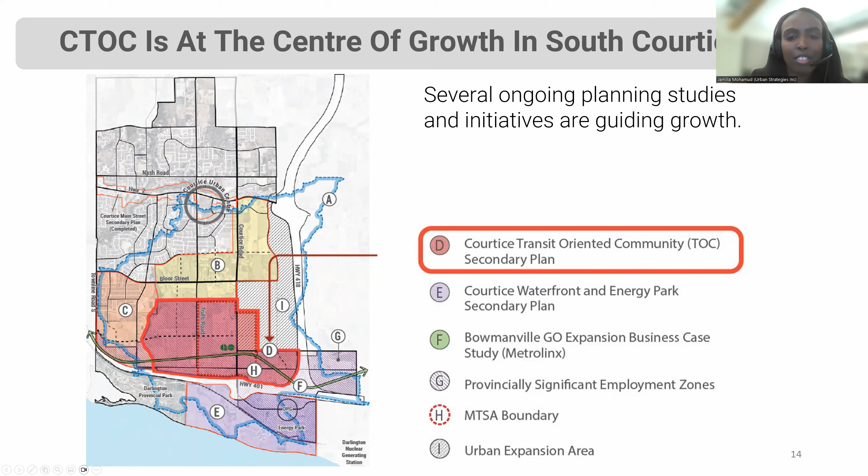Metrolinx is advancing plans for a GO train expansion, and they're continuing to refine design for a recommended option. The proposed new route will strengthen GO services dramatically within the community by providing two-way, all-day service and integral connections to the existing Durham Region Transit bus network.

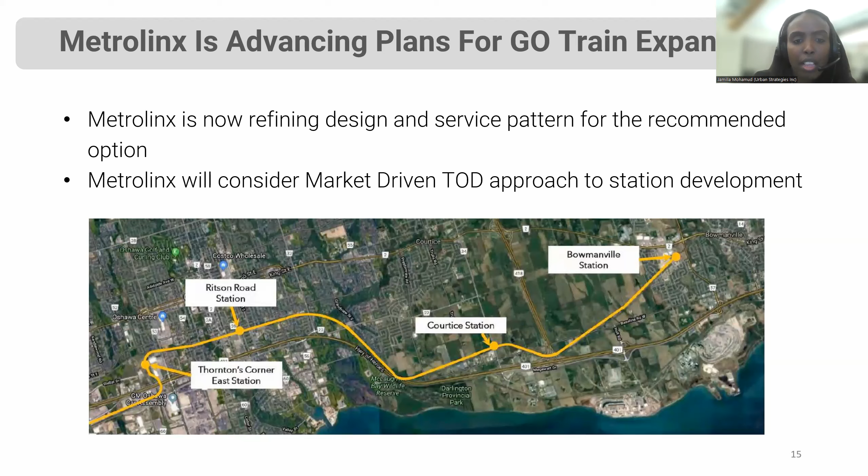Provincial policies have emphasized the significance of transit-oriented development, as highlighted in the provincial policy statement. Some policies speak to accommodating a significant supply and range of housing options through transit-oriented development, TOD, helping prioritize intensification in proximity to transit corridors and stations, as well as improving the mix of employment and housing to shorten commutes and decrease congestion.

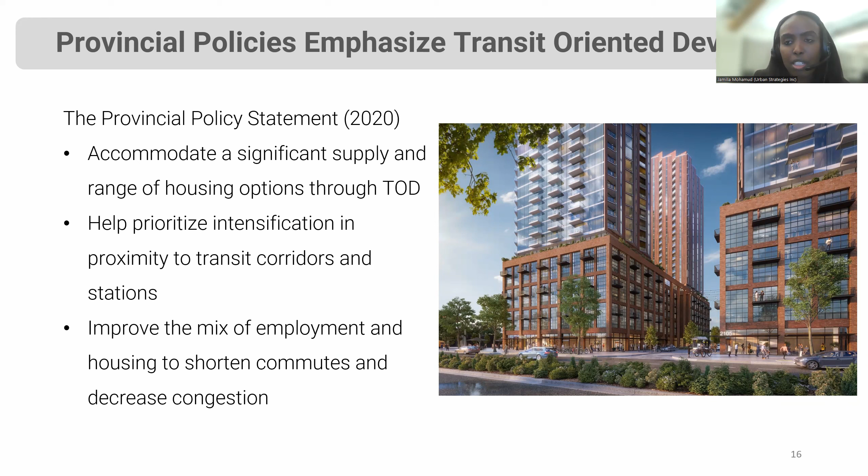The growth plan also speaks to the significance of major transit station areas, or MTSAs, as areas to focus mixed use and higher density growth. These policies address the lands within 500 to 800 meters of higher order transit stations, such as the GO station. They also focus on transit supportive densities and a diverse mix of uses. They set minimum density targets, and the Courtice MTSA will be planned to achieve a target of 150 people and jobs per hectare.

Development in the MTSA should also be planned to have a range of housing options, and the Planning Act provides municipalities with tools to require a defined amount of affordable housing within new developments through tools such as inclusionary zoning.

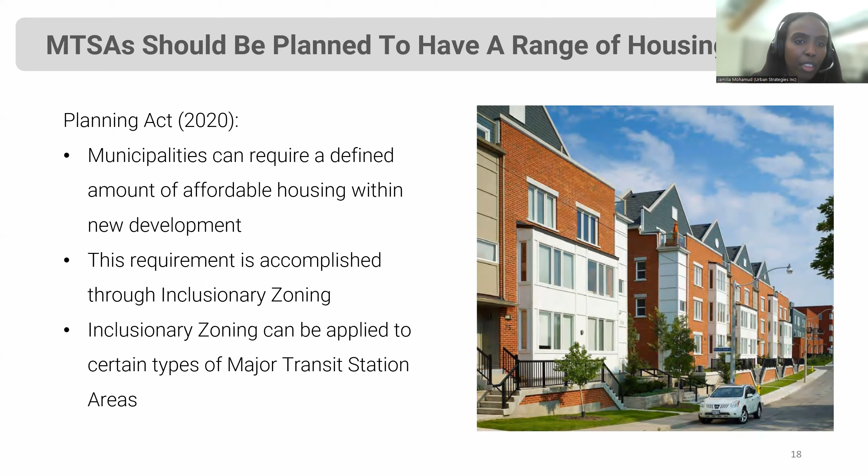Through the conversations that we've had with the public, stakeholders, and landowners, we've been able to integrate that into a set of planning policies. These 15 guiding principles were developed for the CTOC area to guide planning and provide a foundation for the secondary plan. The principles were informed by the study team's analysis of opportunities, review of best practices in transit-oriented community design, and consultations. In addition to guiding the development of land use options, the principles provide a basis for the criteria used to evaluate the 3 land use options we've already spoken about. The guiding principles are grouped under key themes: the environment, places for living and work, moving around, the public realm, and fiscal sustainability.

So I'll pass it to Tim, who will speak to you more about how we've integrated the feedback into the draft preferred land use plan, road network, and policy directions.

Great, thanks Jamila. Good evening, everyone. Before I jump into the draft preferred land use plan, I just want to spend a few slides providing a little bit more background. Hopefully from Jamila's part of the presentation you get a sense of a lot of the background work that has been done and what's gotten us to this point.

More specifically, what's led us to the preferred land use plan is the exploration of some land use options that began almost 2 years ago. We have been at this study for quite some time, as some of you are well aware. Coming out of our first phase of work, we identified what you're seeing here on the screen, a very high level framework for defining land use districts and generally exploring land use options.

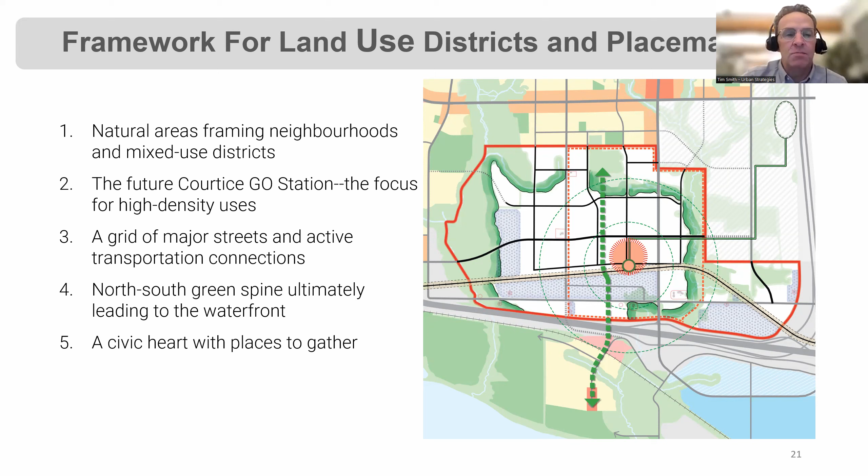Moving on, Jamila, next slide.

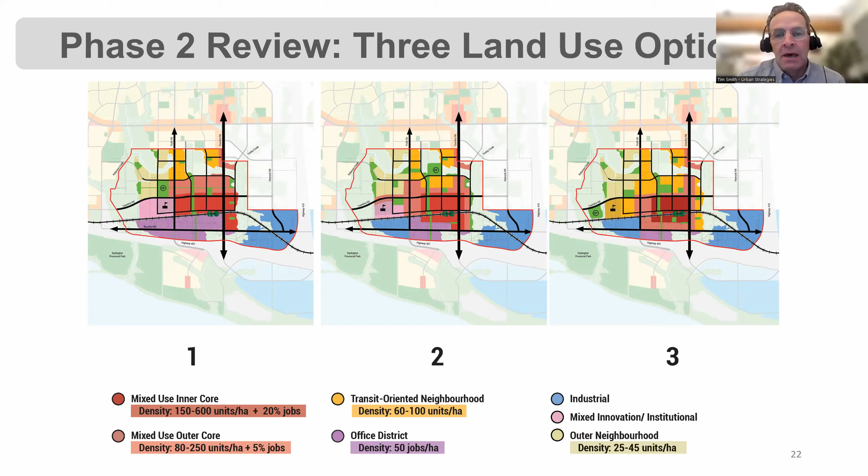So I won't spend a lot of time walking through the land use options, but just to give you a sense of the work that was done, we created three options that looked at the land use districts you see at the bottom here: a mixed use inner core, mixed use outer core, transit oriented neighborhood, an office district, as well as industrial areas and a couple of other areas, including an outer neighborhood focused west of Trulls Road. You see different approaches to distributing those land uses, as well as different approaches to locating future major parks. As you can see, they're all based on the same road network.

Next slide, sorry, Jamila.

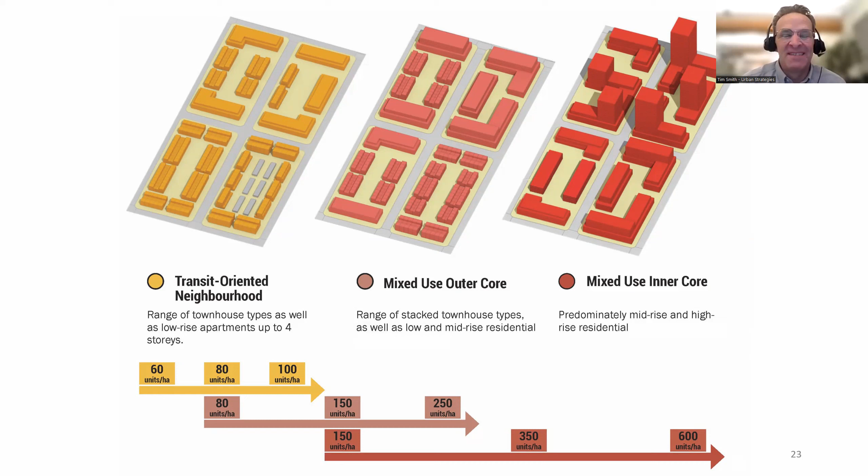Okay, let's now shift to the preferred land use plan, but first let's begin with the road network. We have made some adjustments to the road network you saw in the land use options based on further technical study. We have with us today Stephen Keene from CIMA+, who's been supporting us with transportation and servicing analysis. Fundamental to the design of any community is determining where these major roads go, and of course they will be complemented by many local streets that we'll talk about later. This gives you the infrastructure framework for the land use plan.

You can see there the green spine. This can be carried forward from that framework diagram I just showed you, along with the hierarchy of roads. We can move on, next slide.

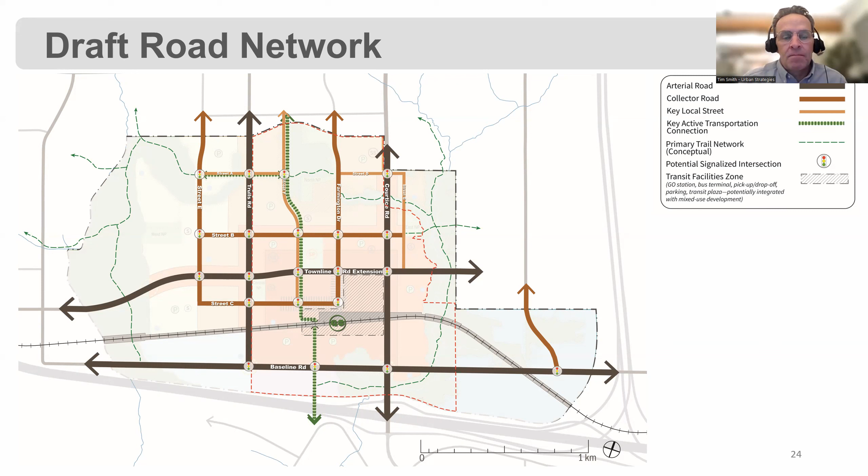We had a slightly different name, it was the outer core area before. We've just changed the name of it, but the intention is the same. This is also an area for high density development, but development that will actually provide a transition from taller buildings in the core to more mid-rise and lower forms of development as you move further west and north in the MTSA area.

I should have mentioned, in that mixed-use core area, the hatched area—you see the black hash marks there—indicates where we see a focus for future retail and other active uses lining those streets close to the GO station. So as folks are walking or cycling to the GO station, they're passing by amenities, restaurants, shops, that type of thing. There will of course be many other areas, in fact anywhere within these red areas, retail and other commercial uses will be permitted. So there's lots of flexibility in terms of where retail can go, but we definitely want to get it on those two streets.

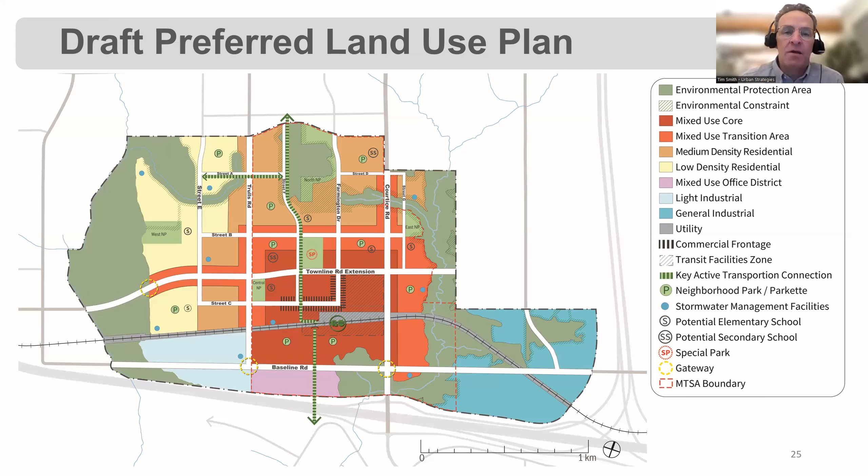I've covered much of this information on the next few slides by describing each of those land use districts, but I'll just hit a few key points here. I've already described the mixed use core, the range of uses there, which would include not just housing, but office, retail, and institutional uses.

We are looking for a minimum density in this area of 400 units per net hectare to support the GO station, and heights up to 40 stories. Along the busier arterial roads, we're looking to have minimum heights of 6 stories. Finally, we do want to make sure we get some employment uses beyond retail uses within the mixed use core, so we're looking for at least 10% office space on sites within 250 meters of the future GO station.

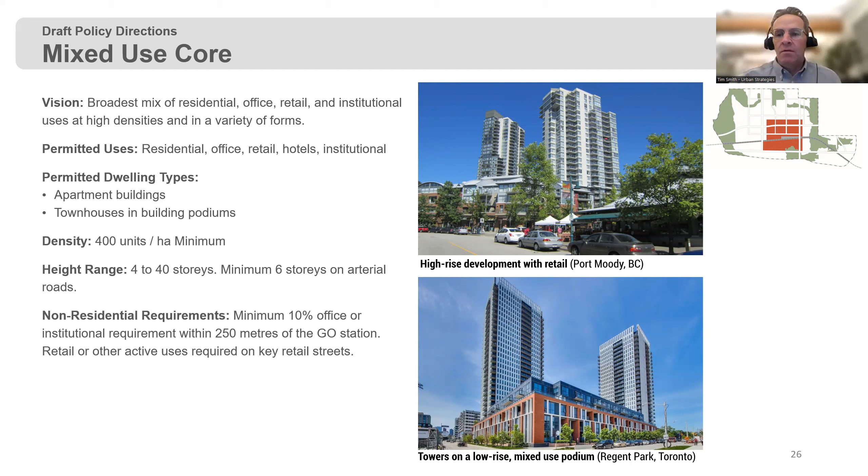So as I mentioned, the mixed use transition area is again an area for higher density uses, with the same range of uses permitted in the mixed use core. There's a bit more flexibility in terms of dwelling types here. What would be permitted besides apartment buildings would be stacked townhouses and back-to-back townhouses, those much denser forms of townhousing. Here we're looking for a minimum density of 200 units per hectare, about half of what we're looking for in the core area, and building heights of up to 25 stories.

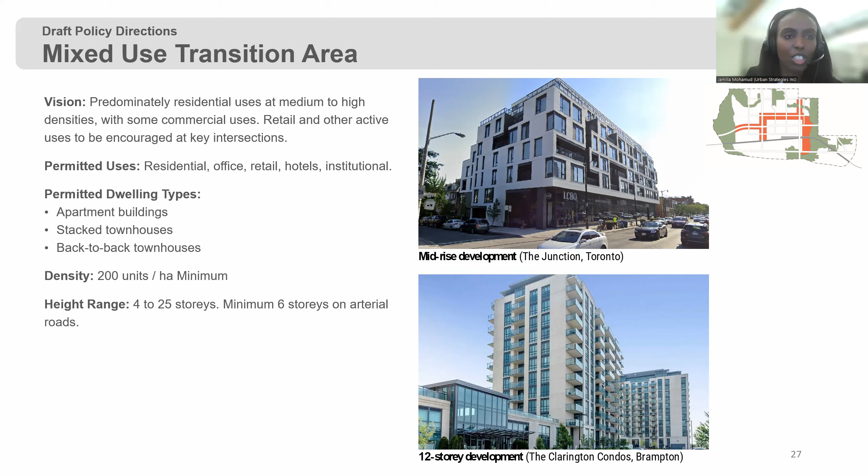At least 6 stories along those busy roads. Next slide. Apologies, there's a bit of a delay. And the medium density area - there's a wide range of dwelling types permitted here. I didn't mention the low rise buildings as well. It just went a bit too far there, Jamila. Sorry, just going to click it. Apologies, folks.

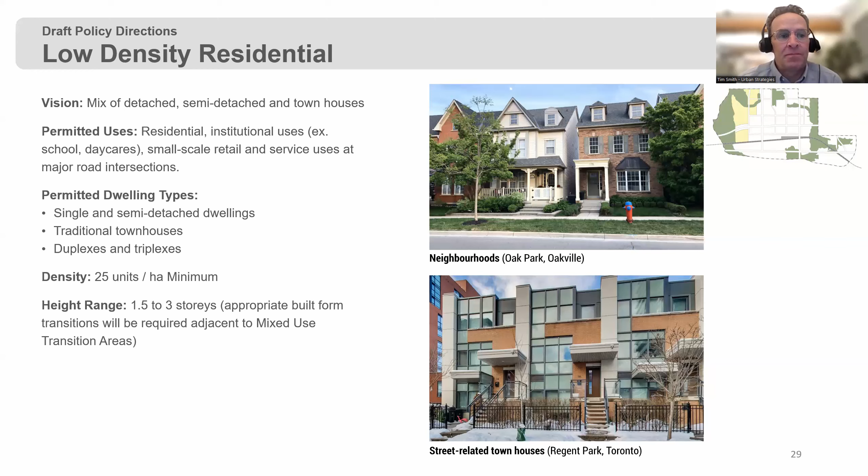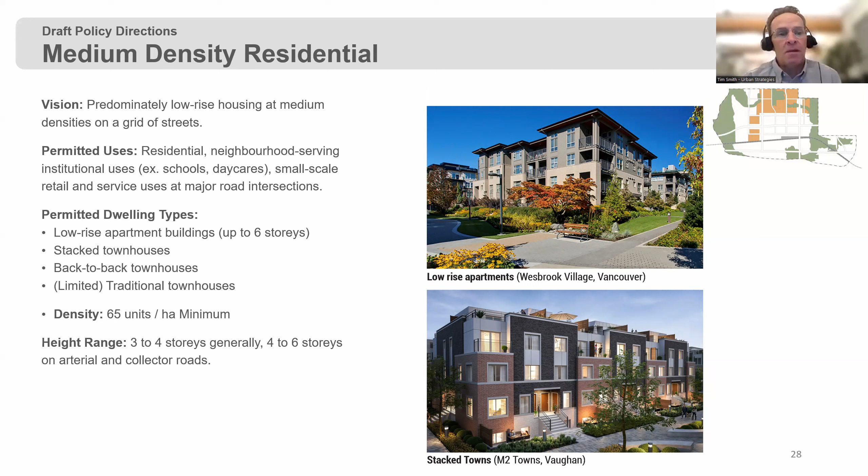Yeah, medium density, there we go. Range of uses here, low-rise housing. This is an area of predominantly 3 to 4 story buildings, although along the busier arterial and collector roads, heights could go up to 6 stories. So apartment buildings, stacked townhouses, back-to-back townhouses, and in some locations traditional townhouses integrated with these other forms. Here we're looking for a minimum density of 65 units per hectare. To give you a sense, a more traditional townhouse development would be in the range of 35 or 40 units per hectare, so you can see the mix of other low-rise forms of housing we'd be seeking. Next slide.

And in that low density area, as I mentioned earlier, this is really a more traditional neighborhood form of single, semi-detached housing, as well as traditional townhouses. Consistent with the recent provincial planning reforms that open the door for greater housing diversity in all neighborhoods, including what traditionally have been single detached neighborhoods, duplexes and triplexes would also be permitted. The minimum density in this area would be 25 units per hectare, and heights of up to 3 stories would be permitted.